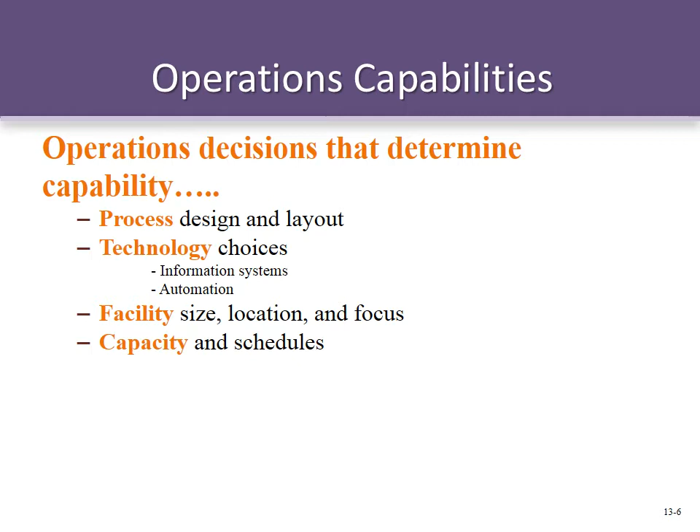It should be clear to you that all of these decisions about the process design, the technology choices about automation and other things, the facility size, location, and focus, and the capacity, all of these issues ultimately are tied to the strategy the firm is trying to implement. So if they're trying to achieve low cost, if you remember from that chapter, then they would align these decisions with efficiency and low cost. If, on the other hand, their strategy is one of differentiation, they will make very, very different decisions about how to organize these decisions.

And then finally, we would talk about the strategic implications of workforce capability, and then sort of the operating activity of this all, which is called supply chain management. And that is trying to understand what your customer demand is going to look like, trying to understand what sources of supply and labor you need to have in order to make that happen, and then establishing the right schedules and inventory and other things in order to pace the production of the product or the delivery of the service or the creation of the experience, depending on what it is you're trying to do.

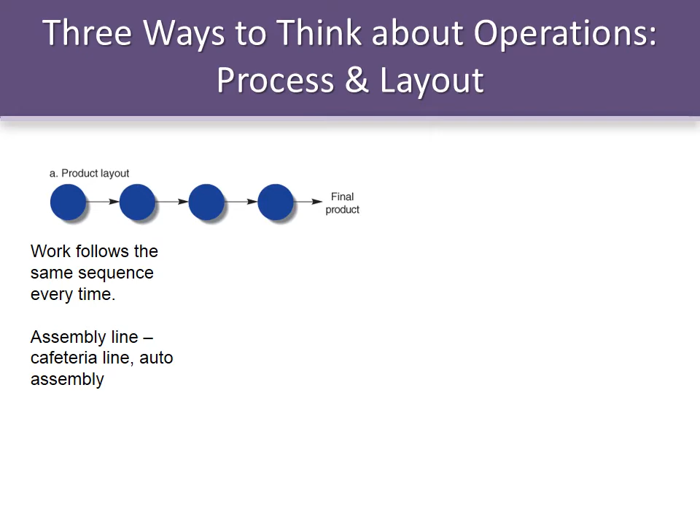And so there's a kind of a specialization of activity or food taking place at each station, and you move along it, or the vehicle moves along it, and as it moves through each stage, it adds to what it has. Another example of a process organization or a flow is a process layout. And again, I call this jumbled flow. A jumbled flow, or even a job shop. That term is used as well.

But just think about what this is like. The idea here is, instead of any customer or say any product moving in a sequential linear fashion, it is moving instead uniquely. It might go from the top left corner to the top right corner and then exit. It might go from the bottom left corner, top right corner, bottom right corner, and then exit. It may be that it goes through all 4, and it could be it goes through all 4 in a different order than what the previous customer or product experienced.

Now, if you think about it, most services are this way. So if you need a service performed somewhere, if you walk into a bank, depending on what you need, you might see a loan officer first, you might have to go see somebody else first. Bank's not that complicated anymore, but you can imagine if you had other kinds of services. Like if you move to a new town and you have to get taxes figured out, and you have to get your vehicle license and a vehicle tag and all of that.

You could think of sort of the almost random nature of where you start, what you do next, and then shift over and go to something else. Somebody else might enter and just be renewing their tag. So there are all these specialized workstations, and depending on what you need done, you move from one to the other. Waffle House is the example of a restaurant that follows this.

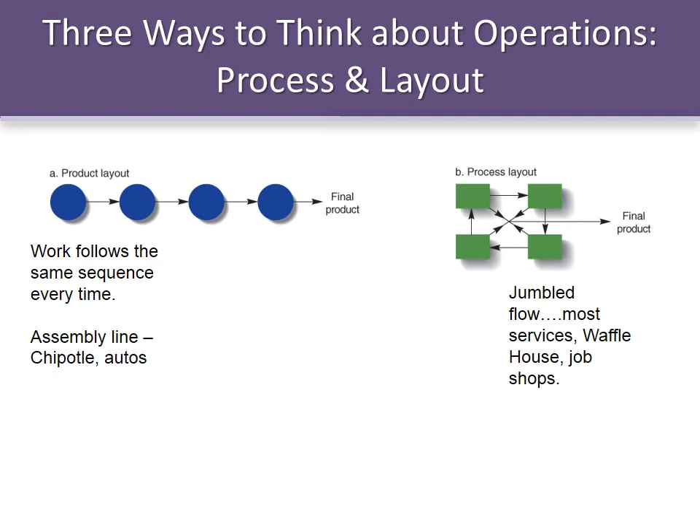The third and final example of a kind of a typical generic layout inside operations or as part of operations is what's called a fixed position layout. Everybody will relate to this immediately. If we were assembling a large aircraft, the aircraft is not going to move along an assembly line like a car, and is also not going to move randomly from one station to another and then exit. In reality, everything's going to come to it.

And so in that particular circumstance, we might have a period of time when certain things or certain operations are performed on the aircraft, and then we schedule the arrival of whatever the next component is to be installed. But the aircraft doesn't leave. The content of the work is scheduled to arrive at that fixed position. So an example would be aircraft assembly.

It would be any construction project, like if you're building a house, building this building that's going in next door, right? Different things are happening at different times, and you're planning a project, in essence. Weddings are another example of a fixed position layout. Everything is being scheduled to arrive at that location. So events, construction, and big item assembly all operate under this same set of circumstances.

What they all have in common is that work is grouped in some fashion. So there's certain work that takes place before other work. So this idea of what comes first, what happens second, what happens third matters, right? That sequence of steps. And then it also matters whether all of the products are experiencing the same steps or certain things experience different steps. So how different are the products that are being produced? How different are the services being provided?

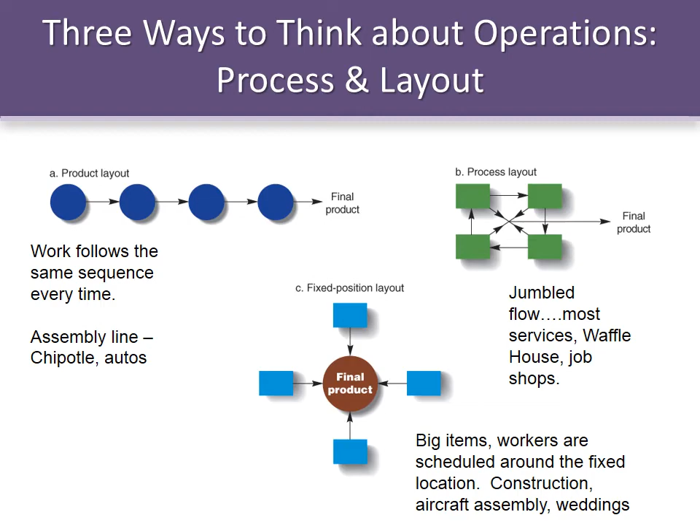So if you have a custom design business, it's going to look more like the green process layout. If you have a large volume, low cost commodity production operation that is assembling something, and it's just doing as much volume as it can flat out all the time, that's going to follow the blue circle product layout, right? It's a little bit of common sense. These are the extreme examples to illustrate these fundamental differences. So I'm not going to go over this in any great detail, but these slides right here summarize some of these points that I was making.

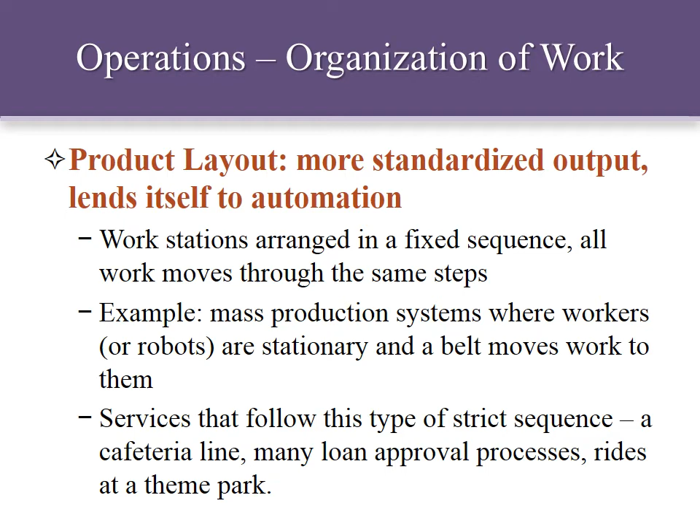So product layout is more standardized output, lends itself to automation, and it describes how the workstations are arranged. The process layout that was at the top right corner in green is usually a lower level of automation, more custom work being done. Now, it could be that each one of those green boxes represented a machine, but there's a human moving from machine to machine, making use of it, a drill, a lathe, that kind of thing, in order to complete a product at the end of that.

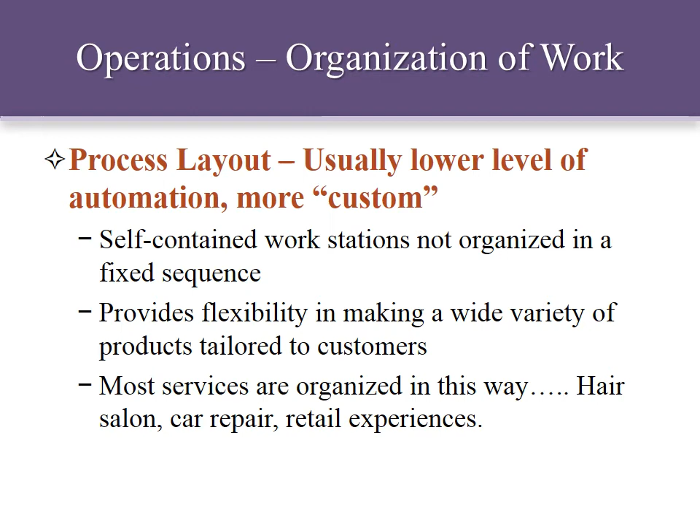Most services are organized in this way. So if you think of a hair salon, car repair, most retail experiences, it's a lot like what is referred to here as the process layout. That's the green box, jumbled flow, job shop model. The fixed position layout, again, is like a wedding or a conference, something that is more of an event. Or a fixed position project like a construction project. And of course that makes sense too.

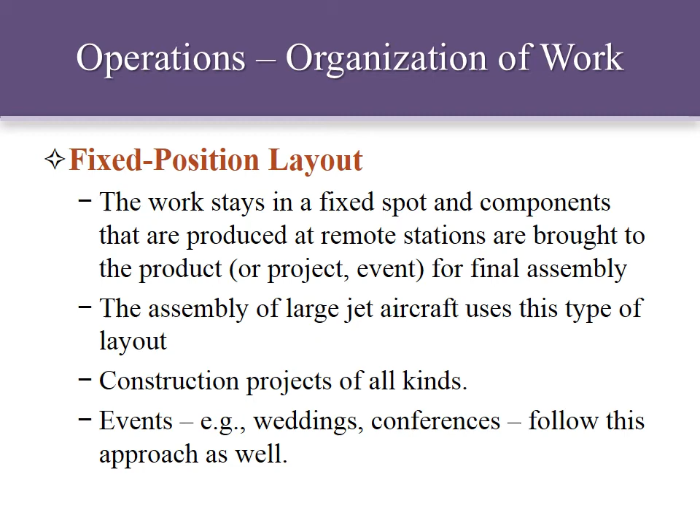So operations decisions that determine capability, if you remember this list that we put up a few minutes ago, let's look at a couple of additional thoughts. So when we're talking about process design and technology, something that we're seeing on the horizon is called mass customization. What does that mean? I just got through saying that the blue assembly line model was more of the mass production, and the green boxes that represented jumbled flow were more of the customization, right? The unique product being provided to somebody.

Well, that's always been the dilemma. Every organization would love to be able to produce more variety at lower cost, right? To combine the best of the features of the blue assembly line and the green job shop. And that's what mass customization is all about. And that is accomplished, in theory, through reprogrammable automation, right? It used to be, and largely still is the case, that when robots are used, they do the same thing over and over again. They just do it 24/7, unlike people, repeating what a human might have done, but without stressing, picking up too much weight, and all the concerns you have with a human doing heavy work.

But mass customization combines reprogrammable electronics with robotics, so that you can accomplish some of the variety that you would want from a job shop-like environment, but at the repetitive pace, without setup time, without learning and all the rest that you would get from a robot. So there are a lot of new technologies helping out with that. There's a lot more data available for figuring out how to organize these things. You can do things at much smaller scale and begin to disaggregate.

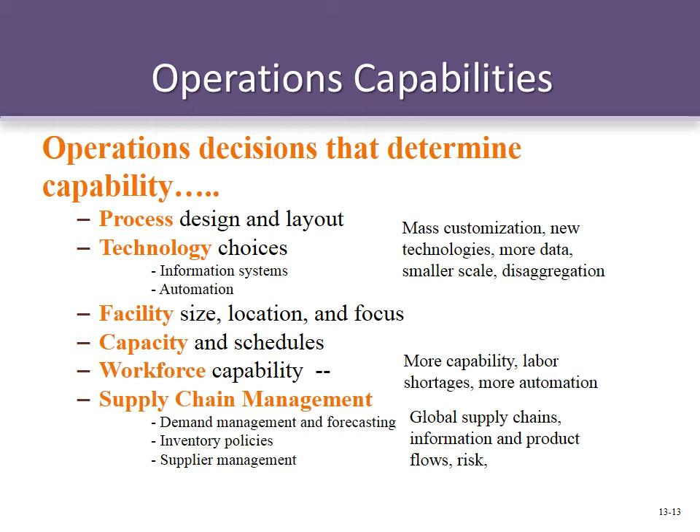I wanted to spend just 2 seconds closing with the idea of why manufacturing matters. There is a tendency, I think, for people to think that the U.S. is no longer a manufacturing powerhouse, and of course that's a misunderstanding. We have far fewer people employed in manufacturing than we once did, just like we have far fewer people employed in agriculture than we once did, and far fewer people needed in either of those activities. Most of our economy now is employed in services.

But the reason manufacturing matters is the same reason agriculture matters. The one thing we can say about agriculture, we still produce enough to feed ourselves and then some in the U.S. So just because we don't employ as many people does not mean we don't still have that capability within the country. We have become infinitely more productive and therefore with that much higher level of productivity, we are able to reduce the numbers of people involved, but still maintain exceptional levels of output. Well, that's true also in manufacturing. So even though manufacturing employment has plummeted, manufacturing output has not. And that's a misunderstanding about the U.S. economy.

But it is the case that there has been a lot of outsourcing that has taken place, usually in areas that are highly labor-intensive, low-skill areas. And some of those things are coming back to the U.S. because automation is allowing them to come back to the U.S. And we'll see more of that, to be honest with you. There's a lot of argument that the U.S. will be an even stronger manufacturing power than it is, and it's extraordinary now, in the not too distant future. And that's because for a long time now, automation has been improving and getting so much better in its capability, not just its efficiency, but its capability, that that opportunity exists.

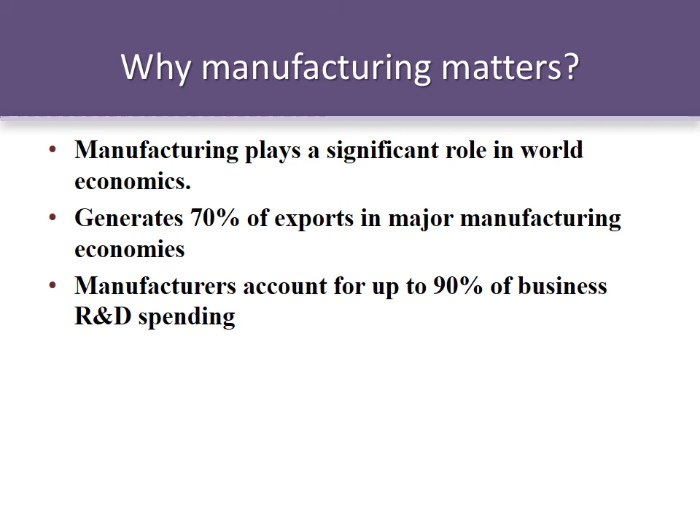So manufacturing plays a significant role in world economies. It is generally the case that 70% of exports that occur from any country are in manufacturing related areas. Manufacturers account for up to 90% of business R&D spending. This is hugely important. If I had to pick the one thing that would say we need to be a manufacturing powerhouse, it's this. It's because it's so closely tied to R&D investment. And R&D investment and the innovations that come from it are a key to national competitiveness. And so those two things go hand in hand. It has been the source of exceptional growth in productivity.

Exceptional growth in productivity. Historically, as nations develop, the manufacturing share of that nation's gross domestic product, meaning what it produces inside the walls of the country, peaks at 20 to 35%, and then growth shifts to services. And if they have a strong service economy, the percent of GDP allocated to manufacturing will go down below 20 to 35%.

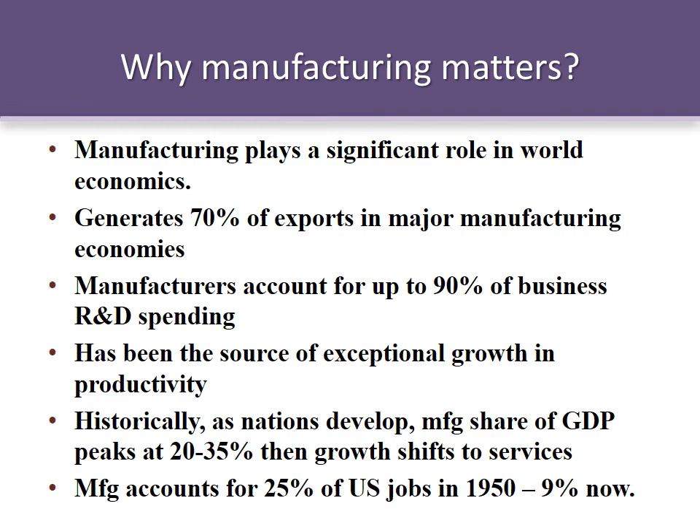Manufacturing accounted for 25% of U.S. jobs in 1950 and only 9% of U.S. jobs now. Less than 10% of U.S. jobs now. But this only goes through 2010, and I'm showing you something from 2010 for a reason.

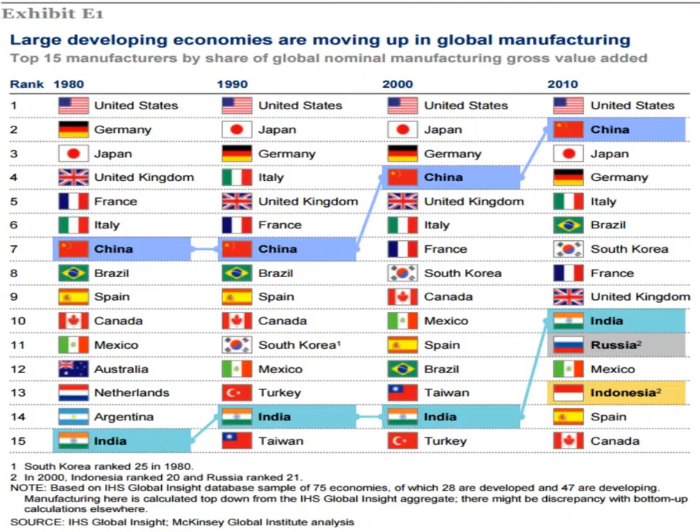And I will say that starting about 2011-12, China did surpass the United States in manufacturing gross value added. Okay, they are a bigger manufacturing economy than the United States. But just like the United States, the number of employees attached to manufacturing has gone down because of improvements in productivity. This is another illustration, again talking about manufacturing output. It just came a little further forward in time, 2014, showing the U.S. just right behind China in terms of manufacturing output and how the other countries line up with that going out.

Now, there are as many different ways to calculate manufacturing output as there are ways to present them, and so there's things that are value added. Look at manufacturing value added, which just means you subtract the supplies that come into it, if supplies were imported from somewhere else, and it is the case the rankings stay the same. I've seen those numbers too. I just don't have them in a graph. I have them in a table, and they don't look quite as good. So I just want to make the point to you that manufacturing in the U.S. is strong, regardless of what you hear.

Particular industries suffer, because some industries aren't viable long term, and some industries need to make investments in technology to be more productive. And when they don't, like textiles and apparel, they tend to be shipped offshore where things can be produced more cost effectively. And that's because they did not make investments in technology to move toward automation. So the jobs would have been lost either way. The jobs in low-skill manufacturing would have been lost anyway.

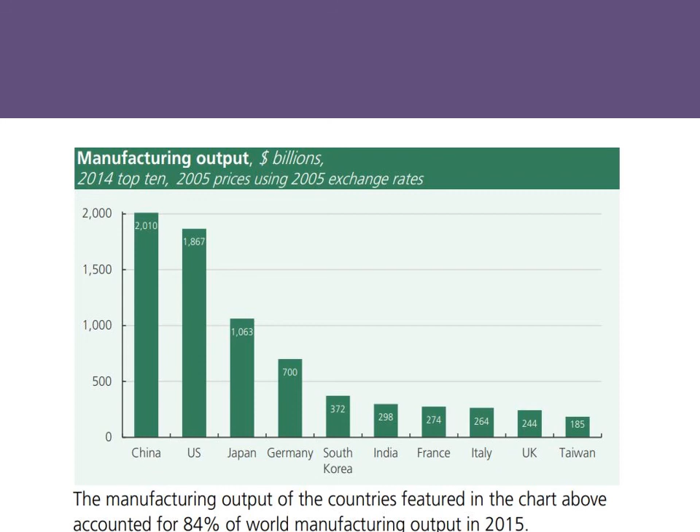Okay, this wraps it up. So I hope that gave you a little bit of an overview of operations management, what their primary concerns are, what the sort of decision areas are that they tend to address over time, and what some leading trends are that will be changing the nature of operations going forward.